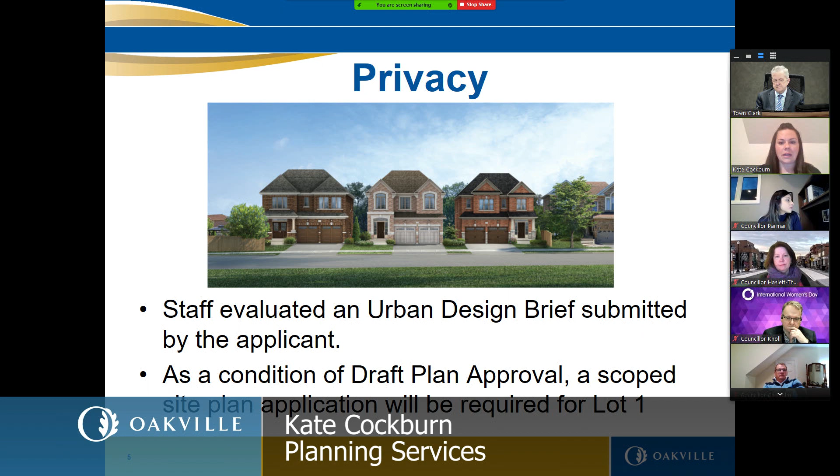With respect to the lot fabric and the shape of the lots, the applicant submitted a study of the frontages and lot areas in the surrounding neighborhood. In review of the applicant's frontage study, it's staff's opinion that the proposed lots will support a dwelling that is similar in mass and scale to the dwellings in the immediate vicinity of the site.

And it will provide the required setbacks, the required parking, and landscape areas consistent with what's found in the neighborhood. Additionally, in consideration of the greater neighborhood context, the variety of lot frontages and lot areas would further demonstrate the compatibility of the proposed dwellings with that surrounding neighborhood.

As such, it's staff's opinion that the frontage study adequately demonstrates that the proposed lots maintain a character of the neighborhood and that the lotting pattern and dwelling design are compatible with that surrounding neighborhood.

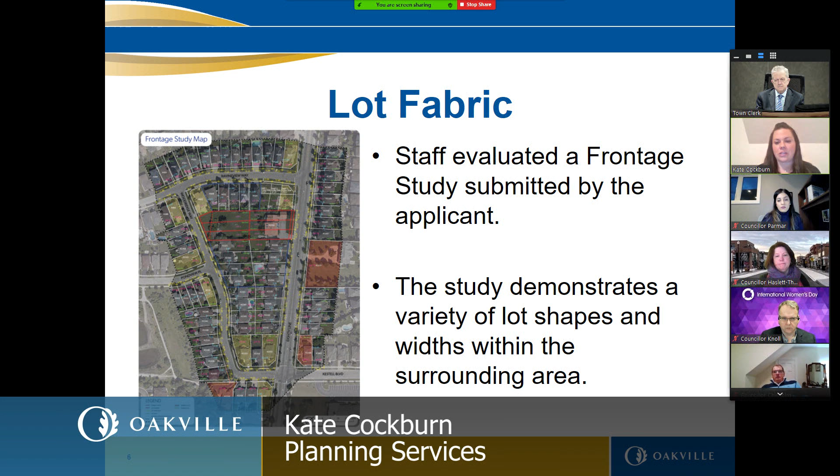With respect to the sidewalk and entrances, the subject lands are currently considered a holdout parcel from the surrounding developed area. The sidewalk that is adjacent to that dwelling is currently an asphalt sidewalk.

As a condition of draft approval, a new concrete sidewalk would be constructed by the applicant to current town standards and would be required to align with the existing sidewalk to the north and to the south.

In addition, staff will require a road widening of approximately 3 meters along 8th line, which would include that existing asphalt sidewalk, to be reinstated as part of the boulevard. And new street trees will be planted consistent with the current boulevard condition to the north and south of 8th line. These works will be carried out by the developer and required as a condition of draft approval.

Transportation staff have also evaluated the proposed development with respect to traffic, parking, and access. And they have advised that the proposed 6 lots present no negative impacts to the existing on-street parking conditions or the transportation network, and there are no conflicts with any existing driveways.

Staff note that there are currently no on-street parking permissions on 8th line or on the east side of Woodridge Way, which immediately abut the subject lands. These are indicated by signage in the right-of-way. The driveways will be configured in a similar pattern to the existing driveways and present no conflicts.

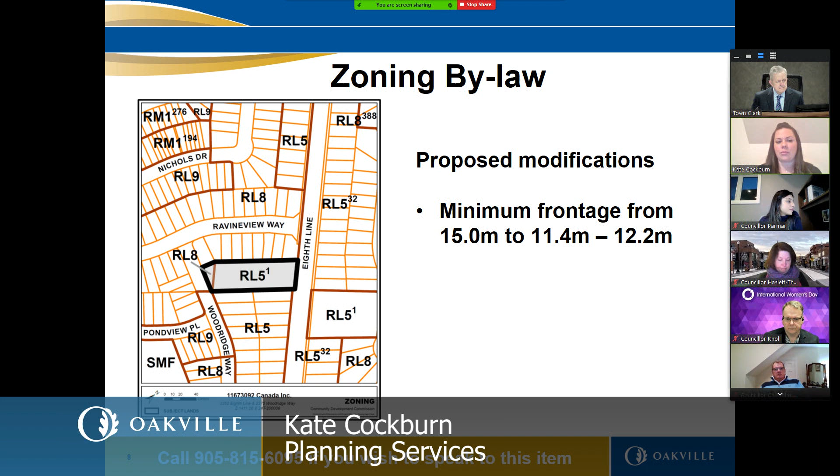The zoning bylaw presented this evening does provide for a modification for a special provision to recognize 11.4 meters as the minimum frontage.

As discussed, a previous public meeting was held and 7 public comments had been received, all of which opposed the proposal at the time. The public comments highlighted lot width, removal of existing well, house size, trees, privacy, town-owned lands, and development timelines as concerns with the proposed development.

It's staff's opinion that these issues raised by the residents have been adequately addressed in the staff report and can be mitigated through the applicable draft plan conditions. No new public submissions have been made to date. Slide, please.

This evening, staff present the following recommendations, items 1 through 8. The recommendation can be found on the staff report pages 57 and 58 of tonight's agenda. The next 2 slides highlight what the recommendation is. I may refrain from reading every single one of them, and I trust that council has reviewed the recommendations, items 1 through 8, which request approval of the proposed rezoning, as well as acceptance of the draft plan of subdivision, where the director of planning be authorized the authority to approve the draft plan of subdivision that has been submitted, subject to the conditions contained in Appendix A and Appendix B of the staff report, and acknowledge that a subdivision agreement will be prepared. Next slide, please.

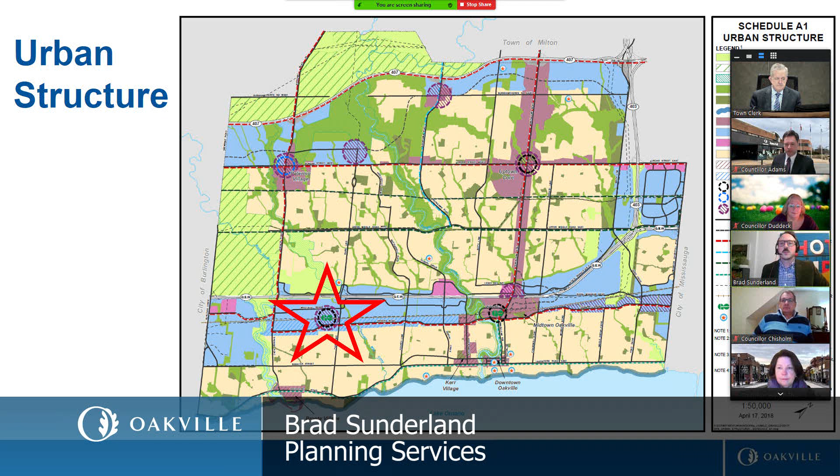Within council's approved urban structure, the Bronte GO station is identified as a major transit station area, which needs to be studied in order to achieve the objectives set out by the province's growth plan and the town's approved urban structure.

The Bronte GO MTSA study was initiated at the Livable Oakville Council Subcommittee in June of 2018. At the meeting, key objectives were identified, and staff noted that consultants would be retained to work with the town to prepare the area-specific plan. In December of 2018, Sajecki Planning was retained by the town to complete the work required to develop the area-specific plan. The study was broken into 5 phases.

In Phase 1, staff held a public project launch meeting with town departments and agency staff and led the consultant team on a walking tour. A public engagement strategy was developed.

On March 21st, 2019, the project's first public engagement workshop was held to solicit input from the public and agency staff to assist in developing ideas for a vision statement and guiding principles, as well as to better understand the challenges and opportunities within the study area. The public engagement session was followed by an online survey, available for several weeks on the town's website, to solicit input on what is working and what could be improved within the area.

Phase 2 included the early development of draft land use scenarios, and the scenarios were first presented at a technical advisory committee meeting containing members from the consultant team, Metrolinx, Halton Region, school boards, Conservation Halton, and town staff from numerous departments, where preliminary comments were collected and considered.

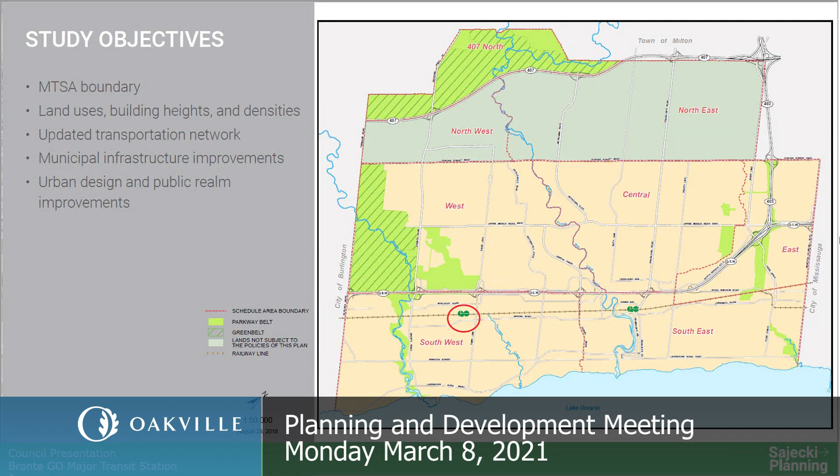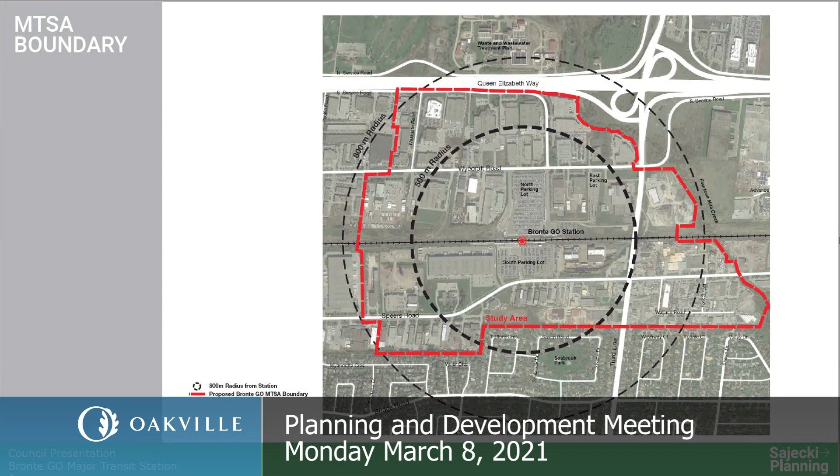A vision and 12 guiding principles for the MTSA were developed with the public. The vision for the MTSA is that the Bronte GO MTSA will be a complete community. It will maintain a focus on employment while introducing residential uses through mid-rise mixed-use development. Over time, the Bronte GO MTSA will transition into a vibrant, pedestrian-friendly hub, serving as both an origin and destination for jobs and residents. The immediate GO station area will serve as the heart of this complete community, with Speers Road as its spine. The guiding principles themselves are based on the themes of seamless mobility, placemaking, and successful implementation.

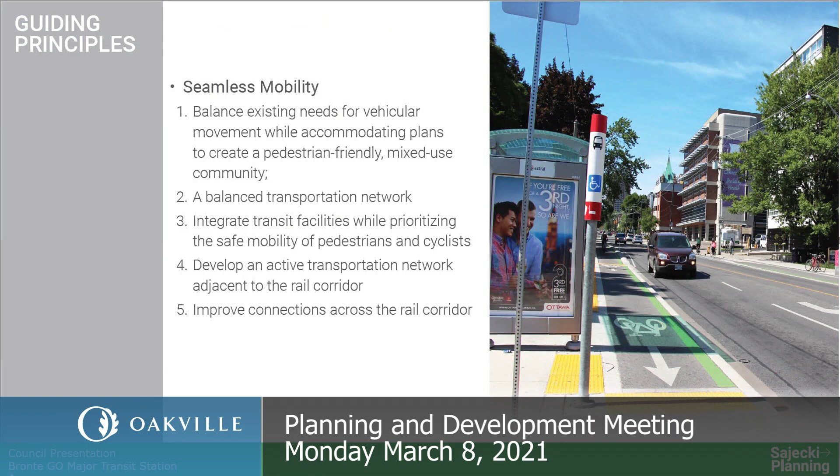With respect to placemaking, key guiding principles were developed that include incorporating active frontages into new development, providing sensitive transitions to the stable residential neighborhoods to the south, and setting the stage to create an inviting and pedestrian-friendly public realm through the development of parks, open spaces, and improved wayfinding and signage.

In terms of successful implementation, the third theme, it is important to ensure that we develop a framework that adopts a phased approach to development, one which balances the needs of existing users but has future adaptability in mind as more office and residential uses are introduced into the MTSA.

These guiding principles were made more context specific through the development of 7 big moves or structuring elements that provide on-the-ground direction for the area's development as a complete community.

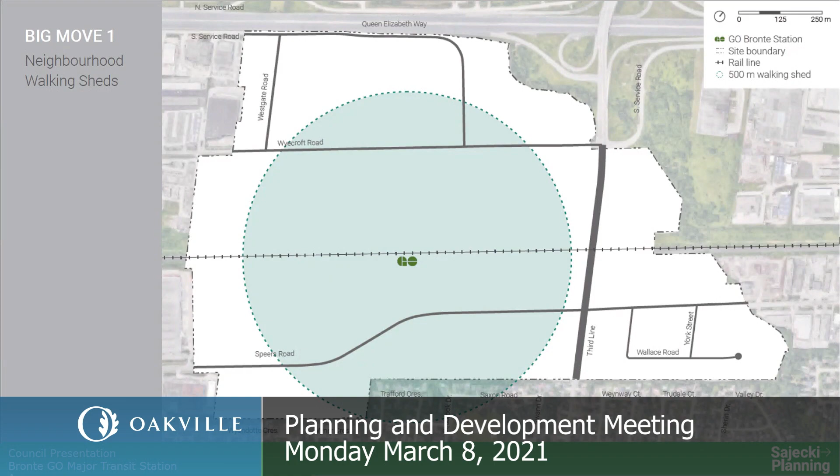The first big move is to use the idea of neighborhood walking sheds as a tool to identify the distance that most people are willing to walk to a destination. The blue circle on this image identifies a 500 meter radius centered on the GO station. It is within this radius that we feel there will be the biggest opportunity to encourage walkability to the GO station, where we felt it best to prioritize a safe and convenient pedestrian-friendly environment with diverse uses and services. This 500-meter radius was also chosen for consistency with the Wyecroft Road Environmental Assessment's walking shed.

The next big move aligns with the idea of a neighborhood walking shed and directs the tallest buildings with the highest densities and intensity of uses at or near the GO station. Densities transition down away from the GO station, particularly towards the neighborhoods to the south.

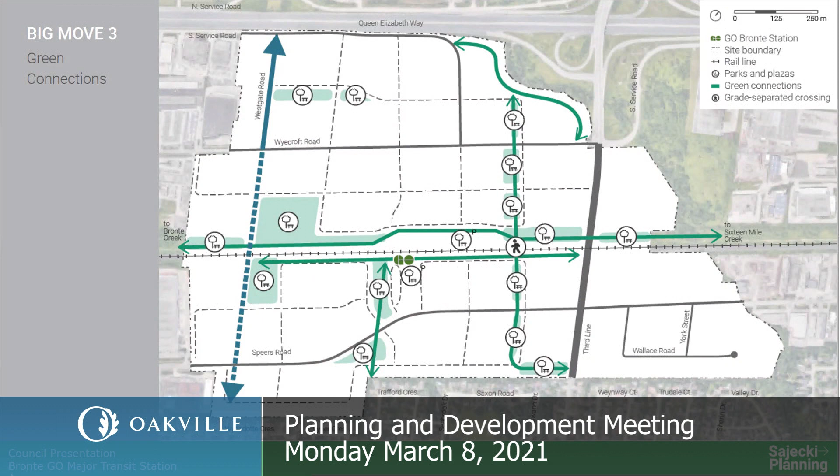The third big move is to develop a series of linear north-south and east-west green trails and paths that can connect to key destinations and natural areas, as shown on this slide. They also provide an opportunity to provide a buffer between mixed use and employment areas. These green connections are also intended to connect urban squares, plazas, and privately owned public spaces.

Big move number 4 is the desire to improve north-south connectivity. Right now, north-south connectivity is largely constricted to along Third Line. So one of the key big moves identified is an extension of Westgate Road, shown by the blue dashed line to the left of the screen. This is recommended to be done through a grade-separated crossing.

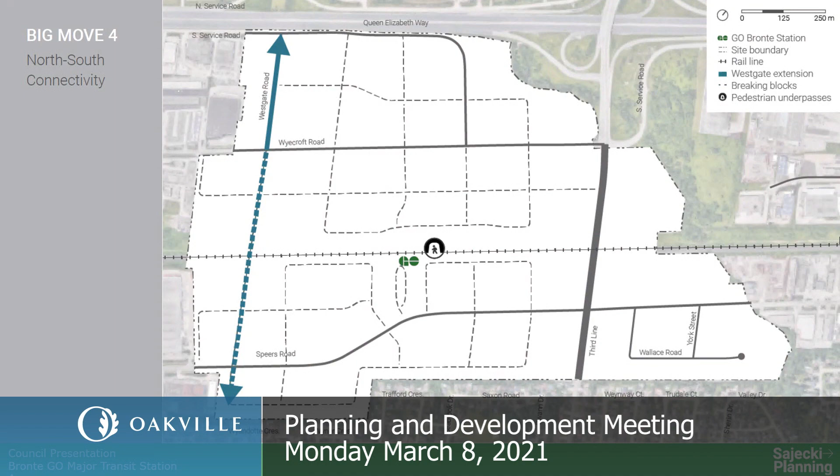Just as important to this big move is the idea of introducing a fine-grained local street network, identified in this image by the gray dash lines. This assists in breaking up existing large properties, providing a more permeable street network.

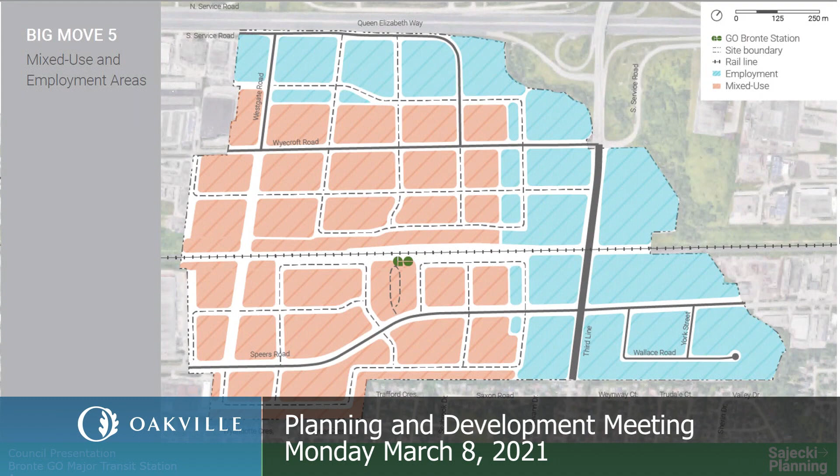The fifth big move is to introduce mixed-use blocks while still focusing on employment uses. This diagram is largely conceptual, showing mixed uses to the left in the orange color and employment uses to the right, but don't pay too much attention to that at this stage. It was later informed by compatibility between employment functions and the desire to introduce sensitive uses, and was informed by our technical analysis.

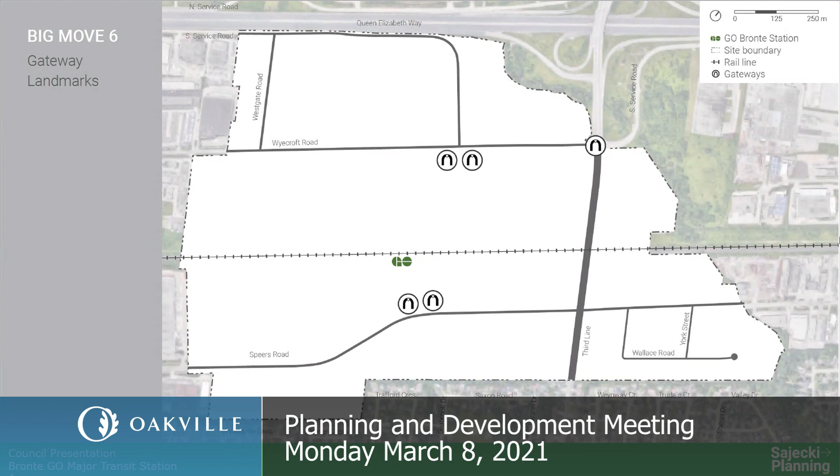With respect to big move number 6, gateways and landmarks, there are not a lot of items in the study area that jumped out as existing landmarks, but the desire here is to introduce a series of gateways and visual connections to help create a sense of place at critical intersections and better guide residents and visitors toward the GO station. The sites located on this image include the highway ramp at Wyecroft and Third Line, and key access points from Wyecroft and Speers Road into the GO station, identified by the circles meant to resemble the Gateway Arch from St. Louis, marking the locations of potential gateways. Gateways and landmarks can be defined via architecture, public art, wayfinding and signage, plazas, or privately owned public spaces.

The final big move was to start to identify potential areas where active retail frontages can contribute to street animation and promote pedestrian safety. It isn't practical to include the entire MTSA as appropriate for active retail frontages, so we wanted to focus on a few key locations, primarily along Speers Road and near the GO station.

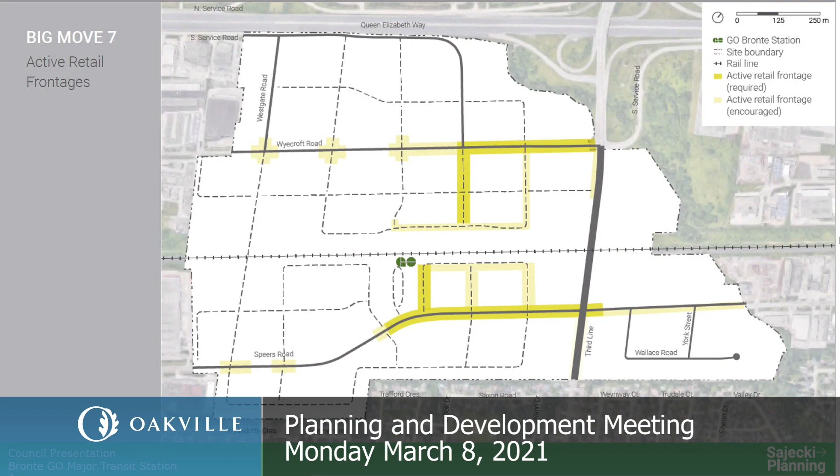These big moves were later informed by a series of technical studies that led to the preferred land use framework. It's this framework that forms the basis for the area-specific plan recommendations. Those recommendations, which we'll walk through over the next few minutes, relate to development phasing, land uses, building heights, the street and road network, the pedestrian and cyclist network, open spaces, urban design in the public realm, community services and facilities, and environmental servicing.

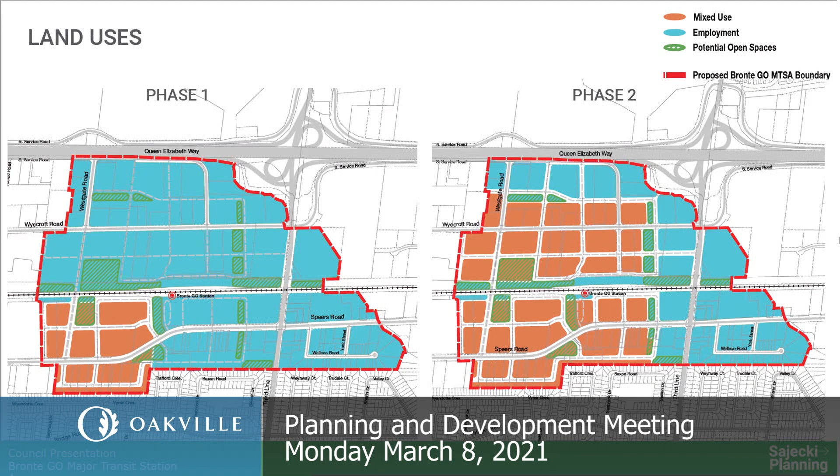This slide focuses on the final land use plan. It shows office employment in light blue, and the office employment designation applies to blocks along the QEW and along the western side of Third Line. Permitted uses should align with the office employment designation in the Livable Oakville plan and include major offices, hotels, public halls, light industrial uses and training facilities, and commercial schools.

Business employment is to the east of Third Line, identified in the darker hatched blue. This designation permits land uses also consistent with the Livable Oakville plan and includes offices and light industrial uses, hotels, public halls, training facilities, and commercial schools.

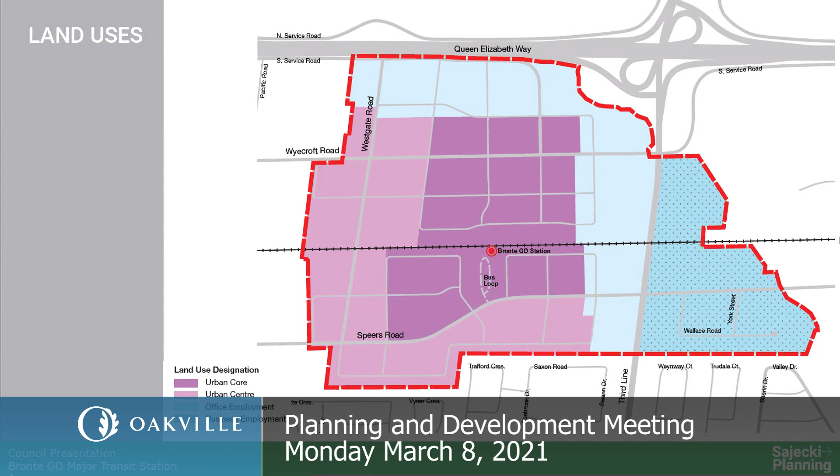This image identifies the recommended road network for the area. New roads within the MTSA are intended to break up larger industrial blocks and strengthen transportation connections to existing roads. On the left-hand side of the screen is the extension of Westgate Road, which is grade separated from the crossing, either above or below the rail crossing.

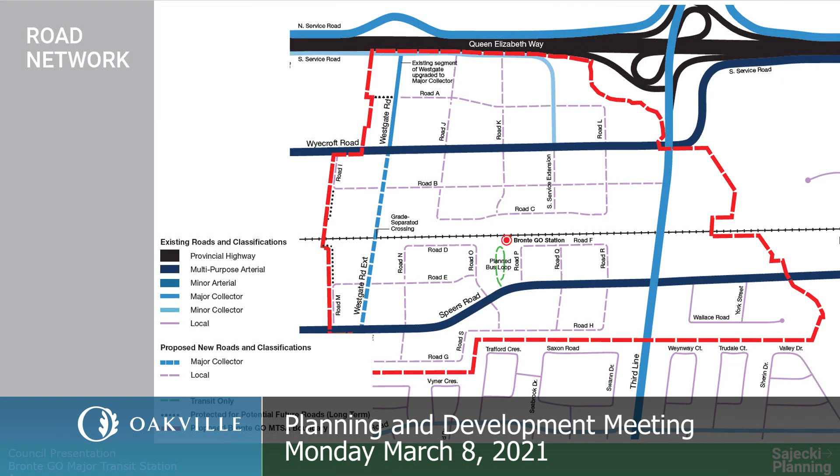This slide shows the proposed active transportation network throughout the area. It includes a new cycling facility along the Westgate Road extension and a multi-use trail adjacent to the rail corridor. It also incorporates currently planned cycling facilities and planned linkages connecting to the major transit station area. Areas for potential active transportation linkages are identified along the southern boundary of the MTSA, providing improved connections from the existing residential neighborhoods to the south and the Bronte GO station.

No specific area has been identified yet, but we see benefit if there's an opportunity to really break those blocks off and provide direct connections to those neighborhoods, rather than forcing residents to commute via Third Line. A few of the specific key directions include an east-west multi-use trail north of the rail corridor that would extend to 16 Mile Creek to the east and Bronte Creek to the west.

There's also an east-west multi-use trail south of the rail corridor that provides connectivity between Third Line and the proposed extension of Westgate Road, and a north-south multi-use trail a little bit west of Third Line that would extend from Speers Road to the south to the 14 Mile Creek trail to the north.

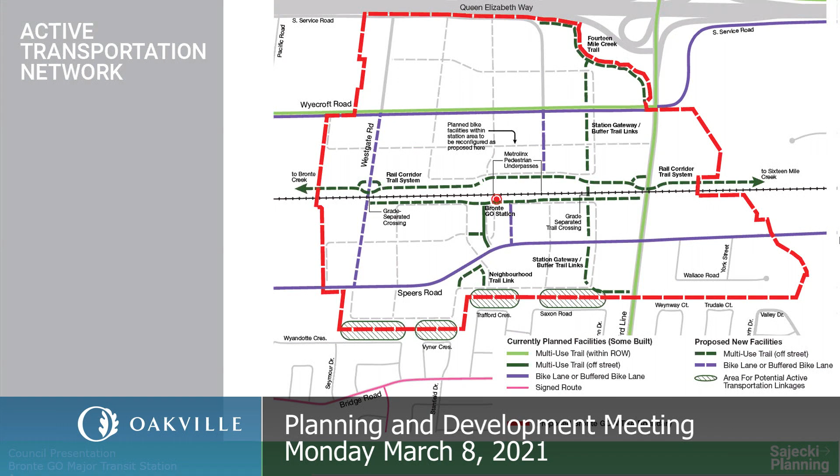This image illustrates potential locations for new open spaces. I should state that the exact locations of any of these open spaces have not been determined, and these would be determined through the development approvals process. We're not saying that any specific site has to be on this specific property.

However, potential open spaces and linkages include multi-use off-street trails providing east-to-west and north-south connections throughout the MTSA and along the rail corridor, connecting to the 14 Mile Creek Trail. There's also a network of potential north-south open spaces accommodating passive uses, intended to provide a buffer between employment and mixed-use areas, as well as the opportunity to provide open spaces and transit plazas near the Bronte GO station.

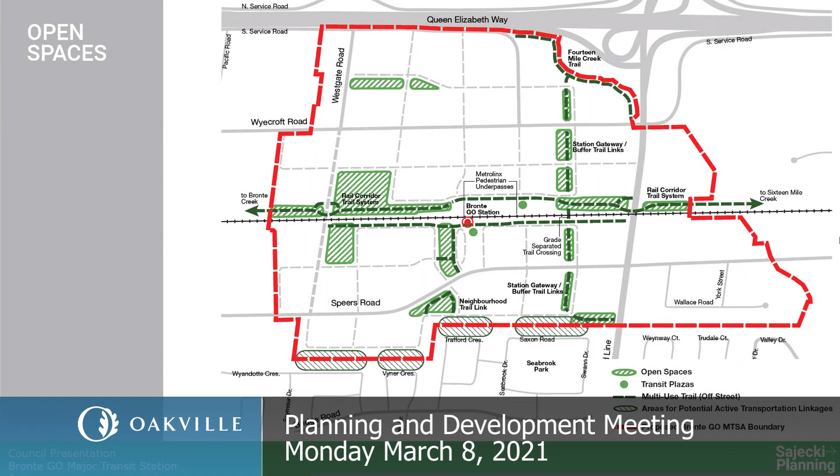There's a lot going on in this image, so I won't go into details on all of them, but this is also illustrative. There is no regulatory policy direction here, but some of the key directions have already been discussed, including the idea to emphasize the planned mixed-use function of Speers Road as a main street with ground floor commercial uses.

This includes providing an accessible park and open space network, including parks, parkettes, and squares, comprised both of traditional parks and privately owned public spaces, establishing parts of the open space system that will connect with 14 Mile Creek, using those linear open spaces as an opportunity to buffer employment and mixed-use residential areas, encouraging travel demand management practices, and an improved active transportation network.

Primary frontages, which it's a little hard to read on this image, are identified by the solid red lines and are areas where we would like to see active frontage uses, including commercial uses. Secondary frontages, identified by the red dashed lines, should be encouraged to have active frontage uses but not necessarily retail uses. We also mentioned before the idea of including gateway locations that can be visually prominent, helping direct people towards the GO station and create that sense of place.

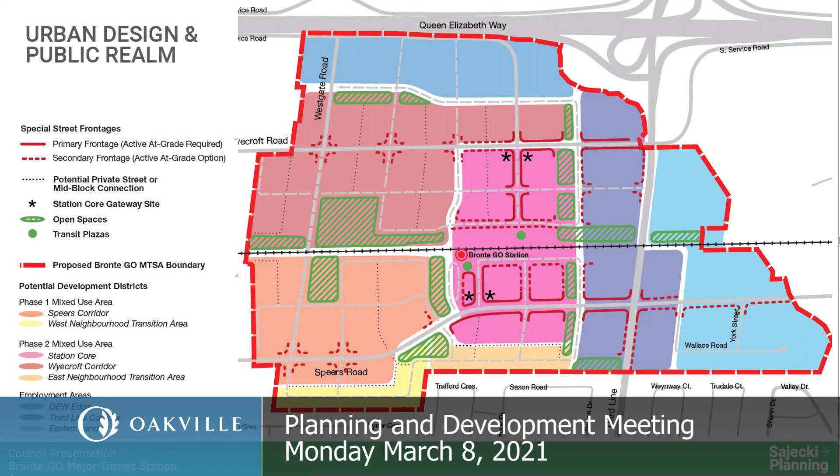And this speaks to some of the community services and facilities that over time, as the area develops, would start to be introduced to the MTSA. The image, again, similar to open spaces, does not indicate the exact locations of any community services and facilities, but it is based on the following recommendations and principles.

Those include that childcare centers, shown in this image by the light blue color, can be located in residential towers and near employment areas to facilitate pickup and drop off of children. Schools, identified by the lighter purple color near Wyecroft Road, should be located away from existing employment areas to mitigate impacts on noise levels and air quality, as well as along green corridors to facilitate active transportation and the use of outdoor space.

Social services should be located near or in employment areas and near public transit and active transportation networks. And community centers should be located near public transit to facilitate local and regional accessibility.

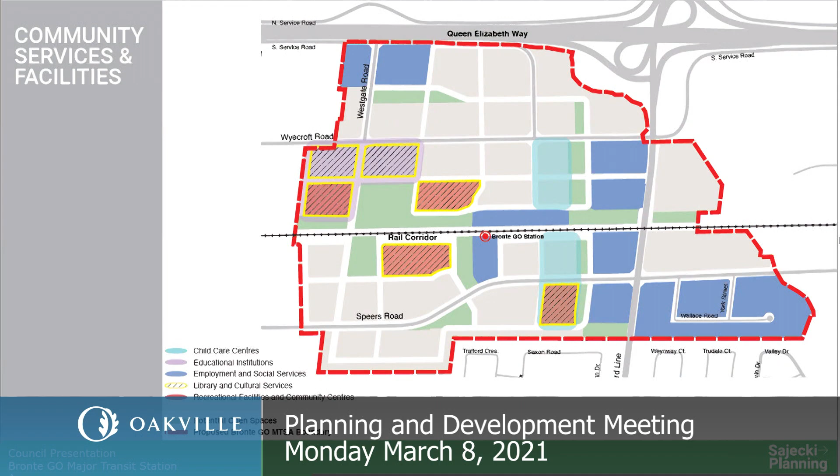And this is just one option of how it could be built out, but it offers a lot of opportunity, a lot of areas for growth, supported very well by regional express rail transit and investments in municipal infrastructure. And we will be excited to see this develop over time.